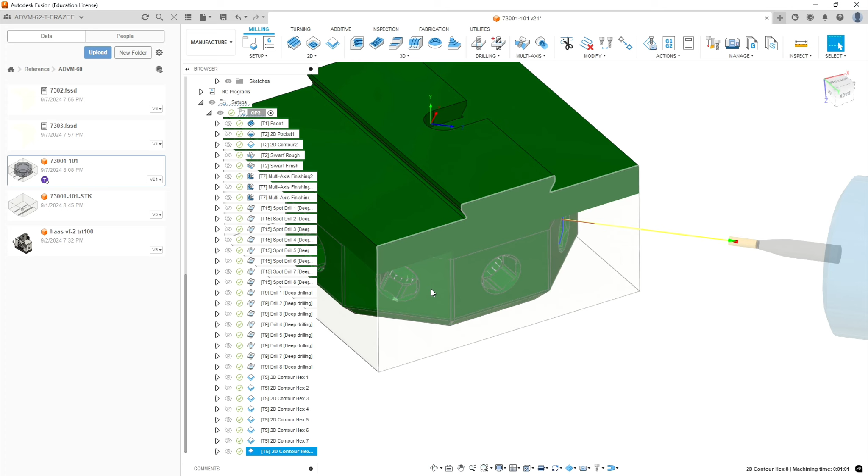We've completed the 5-axis routines on here, and now we're going to go to a 3-axis machine to finish off our operations. So here we go. This is what our stock should look like at the moment. And we're going to take this and put it in a traditional vise in a 3-axis mill. We want to clamp it about halfway across these holes because all the work we're going to do from the orientation we're looking at the part at right now will need clearance for the cutters to roll over.

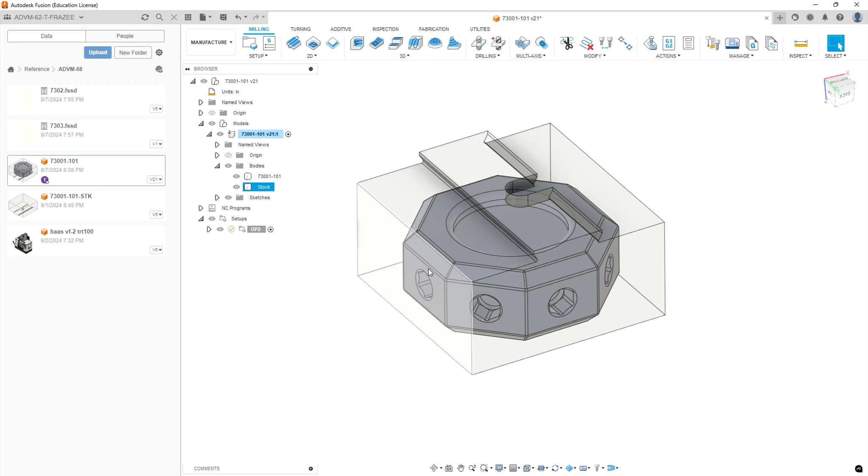I'm going to go ahead and minimize this, and we're going to do a little investigation here. So if we carry over from this stock, we're going to be basically milling the hat off and the edges of the part. So we're going to go to setup. We're going to right click and create a new setup. Now we're going to get some warnings off first, and that's okay.

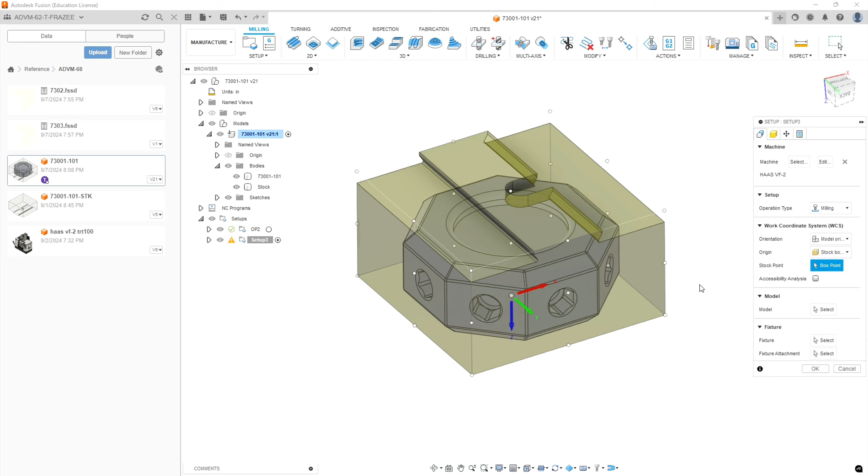Now because we're clamping on the hex, we want to set up our origin based off what we're clamping onto. It's qualified surfaces on the octagon. So we clamp against this forward face, the opposite face, and the left hand side can be our datum for our stop. Okay, and we're going to switch here to model box point, but at the moment we have the stock volume shown, so we're going to hide that.

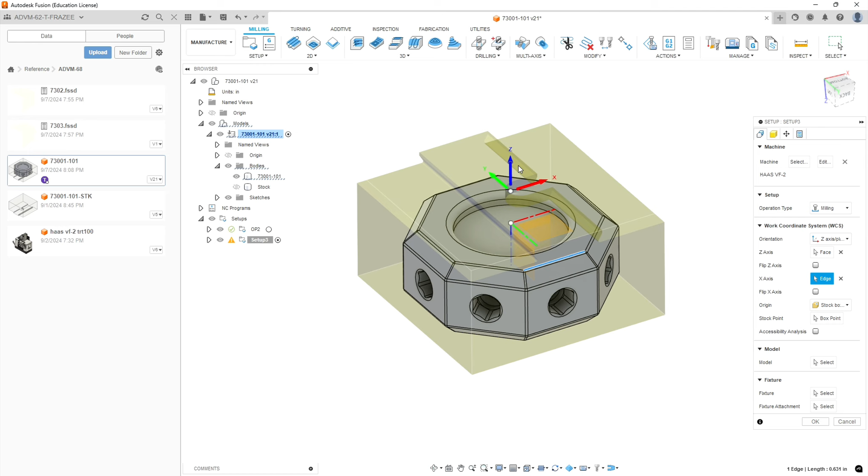Then we're going to go to model origin. We're going to pick plane normal to the z-axis and then the x-axis. So we pick the top of our part and the front edge, which is in the x-axis direction, and this should set the origin in the direction we want. Now instead of basing it off stock, like I said, we're going to go off model box point.

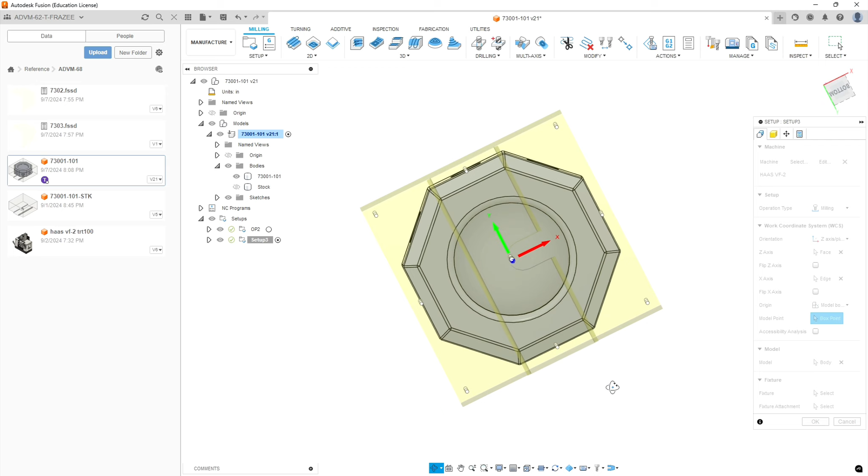And it looks like our model is not selected, so I'm going to go and pick the model itself, so that when I go to model box point, it's actually the model itself. This isn't always selected by default. Make sure you've got your body that's the actual part design selected so that you can pick this back left corner. Now the reason I'm choosing the bottom of the part, we've already qualified that surface. That's what's going to be touching our fixtures.

To set this, we'll put the part on top of parallels, but to find the origin on top of that parallel, we'll use a 1-2-3 block clamped so that the one direction is in the z-axis, and we set our origin on the corner of that to a stop and to the top surface, and then when we go into the offset menu we need to compensate by -1 inch to lower that origin to the top of the parallels. The reason we do that is we don't want the cumulative error of the fixturing where we held onto the part to influence this.

Okay, next tab, our stock. We'll leave it from previous operations, see if that works for us. We do want to deselect the Haas VF2. If it's still selected here, that was an error in my judgment when we set up the part originally. Okay, and then we're going to go to post-process. We're going to call this 7303.

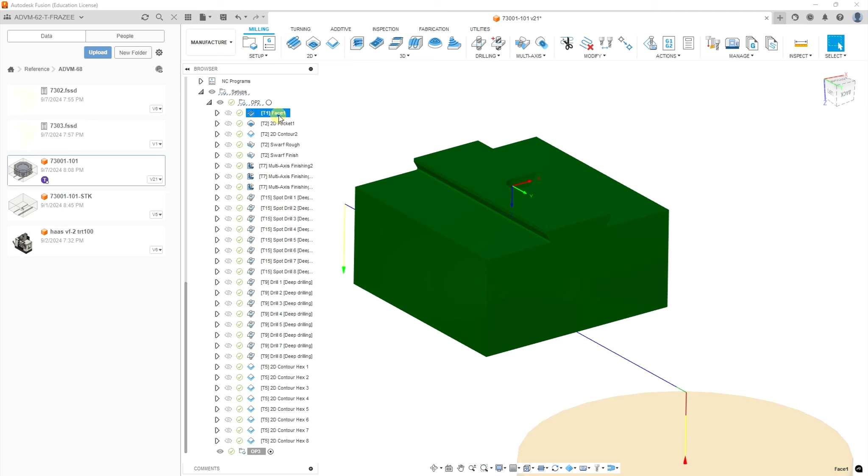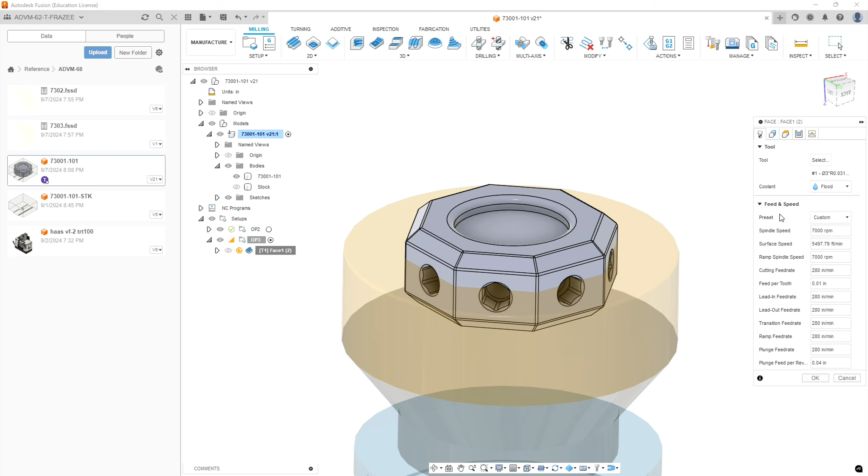We're going to grab our face mill, right click on that and hit copy. We're going to come back to operation 3, right click and paste. We're going to right click on the routine and change some things. We're going to leave all the motions at default. Under geometry though, we don't want a tool orientation. We're going to deselect that, which will bring on our setup orientation for 3-axis.

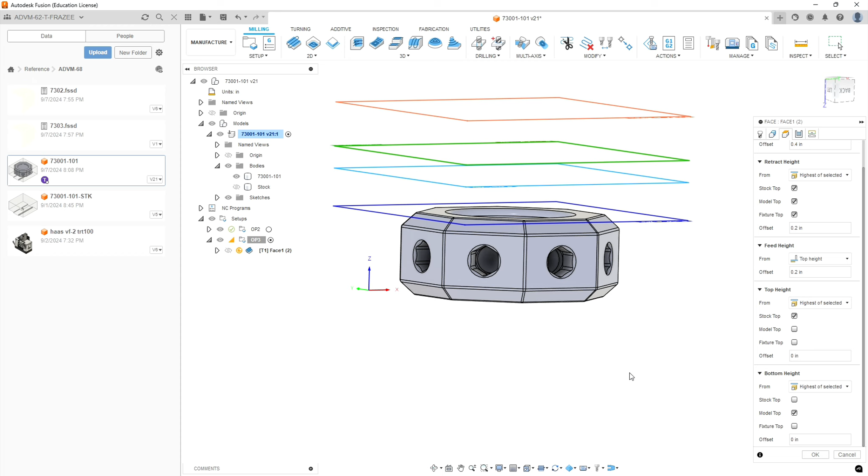And you notice it flipped to the top, and we got our orange rectangle, which is the volume of what we're machining. We'll then go to heights, and our top height will be stock, and our feed height will also come from stock. Our bottom height will be the model top. So we're going to be machining between the two blue planes. Now what we're machining off is the height of our dovetail there.

And that works out to about 344 thousandths when you do the math. So we don't want to do that all in one pass with this cutter, or we'll break it. So we're going to leave all this at default, but we're going to check this box called multiple depths, and we're going to take 60 thousandths off per pass, which I believe is the maximum for this cutter.

And we're going to use even step downs, and we're going to add a finishing step at the end, and we're going to go 30 thousandths finish, and we're going to slow our feed rate down to 100 inches a minute. In retrospect, we're going way too fast for how small this is. So let's go back here and let's slow this down. Let's go 100 inches a minute on these instead of 280. And our finished feed rate will be 50.

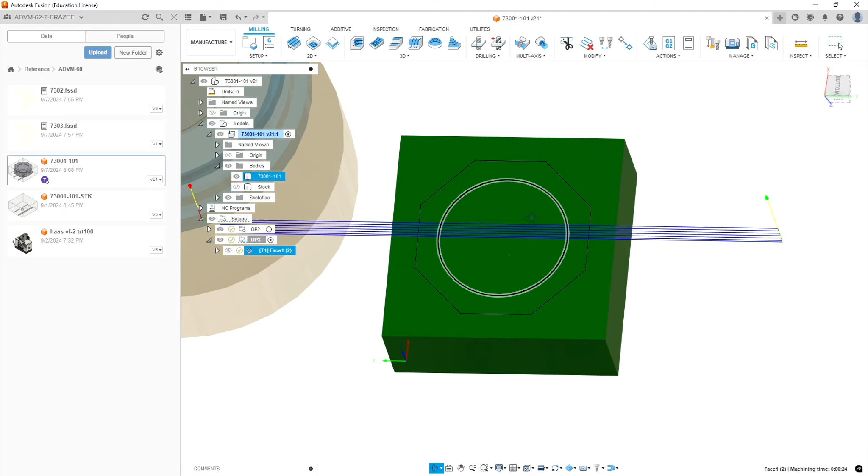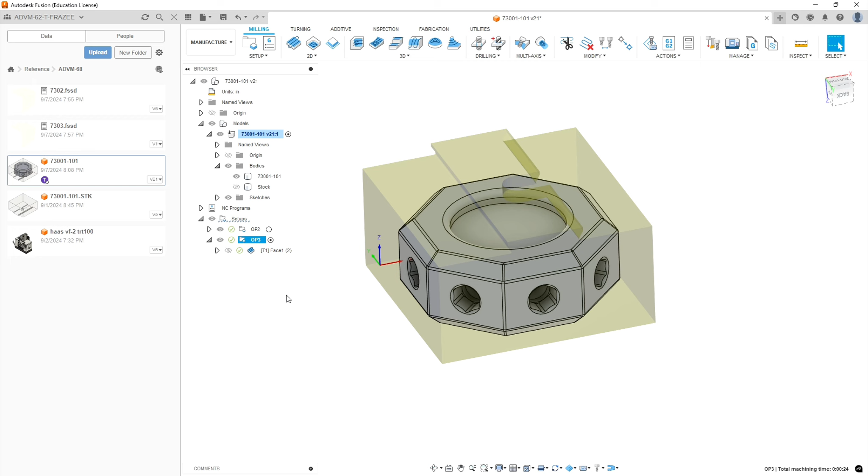Alright, now we can do the same thing with our next routine, which is going to cut this pocket. We're going to go back to Op 2 and we're going to borrow it. We're going to do a copy, close it back up, go to Op 3, we're going to paste. We're going to right click, we're going to edit that routine. We're going to leave everything at default on the first tab.

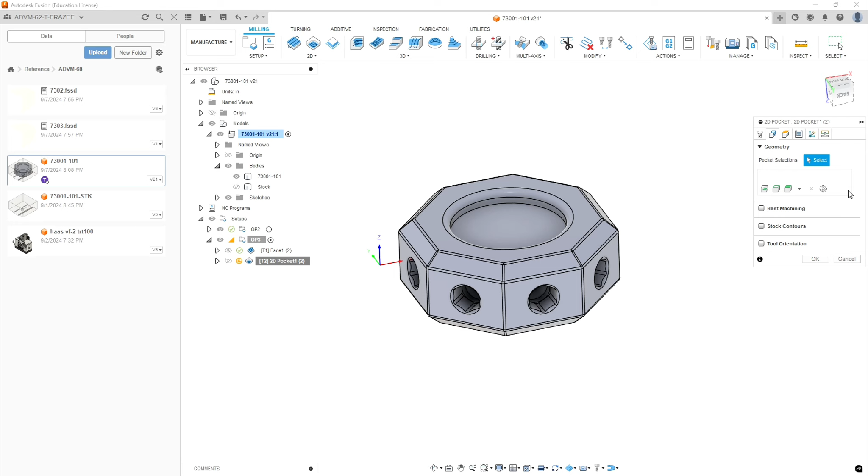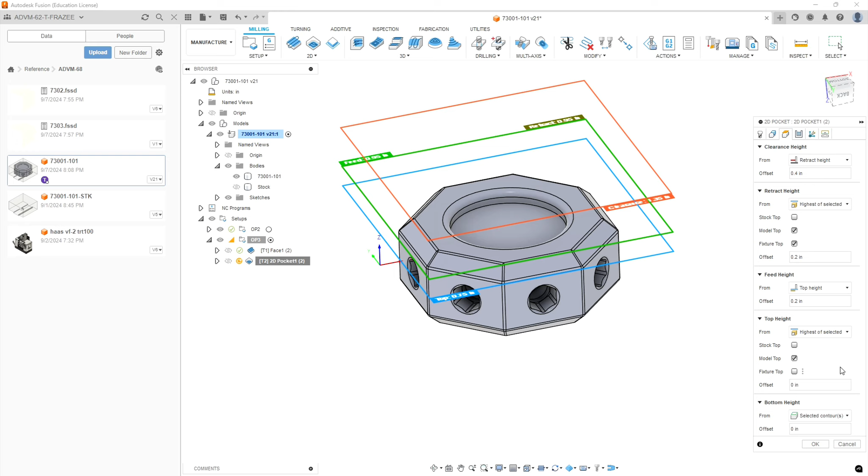On the second tab, we want to deselect what we have selected, and we want to unselect the tool orientation tab. And then we will select our new pocket and make sure that the Z-axis orientation is pointed up. On our heights, we're going to go from model top to model top because we've already machined off all the material above that. And our depth is going to be the selected contour. That's fine.

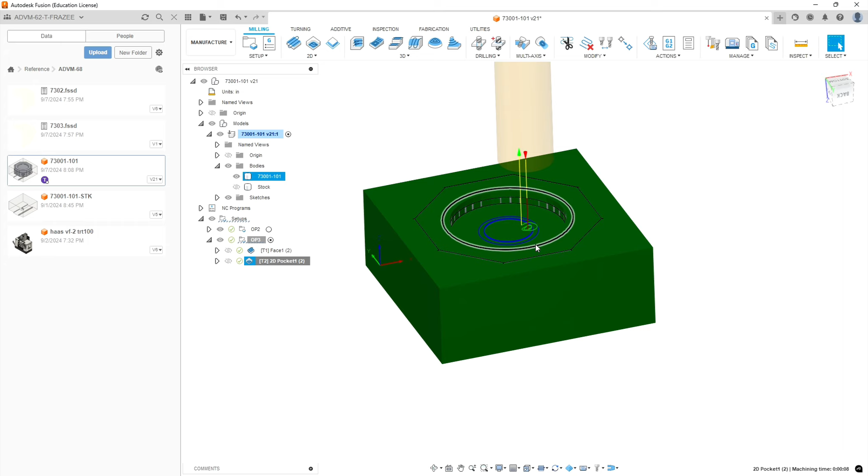Next tabs, we can leave all this the same. Next tab left alone, and the last tab should be the same as well. And hit OK, and we've now pocketed the inside out. Okay, next operation is going to be the inside fillet here.

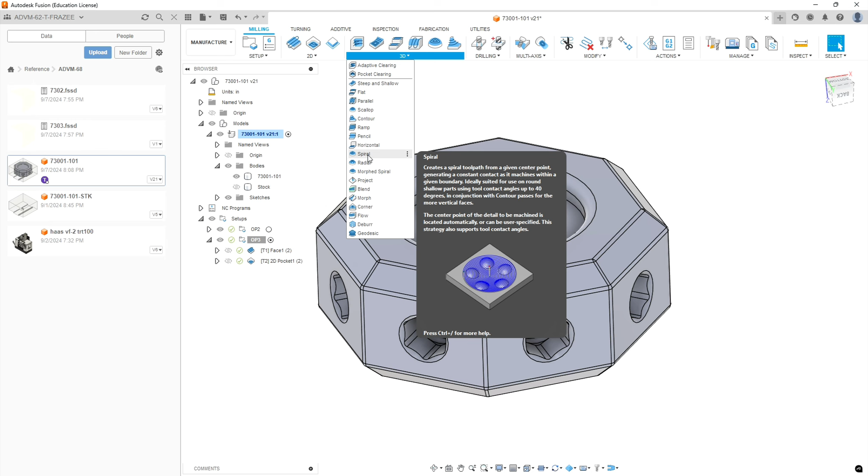We're going to use a command called spiral. Okay, and what this does is it spirals in a circular shape down the surface. And we're going to use the same step over we used in the 5-axis, and we'll see if we see a finished difference between the two different sides. So we select spiral. We're going to use our 1/8 inch ball mill from our library. And we're going to bump the RPM up to 6,000 and 60 inches a minute.

And we're going to go based off selection, and we're going to select the top circle and the bottom circle of the fillet. We're going to change our tool containment to outside the boundary because we want the ball cutter to go past tangency on the interior. And it's going to ask you to select a center point. So we're going to select the center of a circle that's concentric to what we're moving in. So we'll pick the bottom of the pocket.

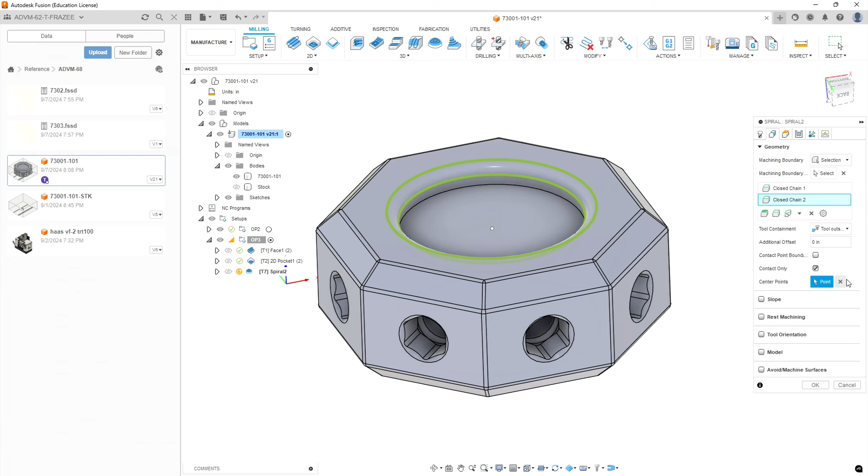And then we're going to avoid surfaces. Pick the top of the part, so we're going to avoid that by 4 tenths. And on the bottom, we're going to do something different. We're going to control that with the heights tab. Again, we're going to go from the top of the model, not the stock, in both cases. That lowers our planes down.

And we're going to select where we want the lowest of our cut to go. We don't want it to go to the bottom of the model. So we're going to pick the floor of this pocket, and then we're going to add 5 thousandths clearance on the bottom. That way we don't gouge into it with that ball cutter. Should be fine. Now we go to the next tab, is passes.

And we are going to machine from the outside in. And it should be going counterclockwise. We may have to check this box. It's kind of confusing on how it interprets what way is clockwise. So we'll have to simulate it and see, make sure it's climb cutting.

Okay, we're going to leave the outer limit at default, and our step over is going to be 5 thousandths. We want to cut in one direction, so one way, and we can go both up and down. And then we're going to pick this box that says smoothing. That's just going to increase the tolerance at what the surface is cut at. Multi-axis, there's nothing to set on that tab.

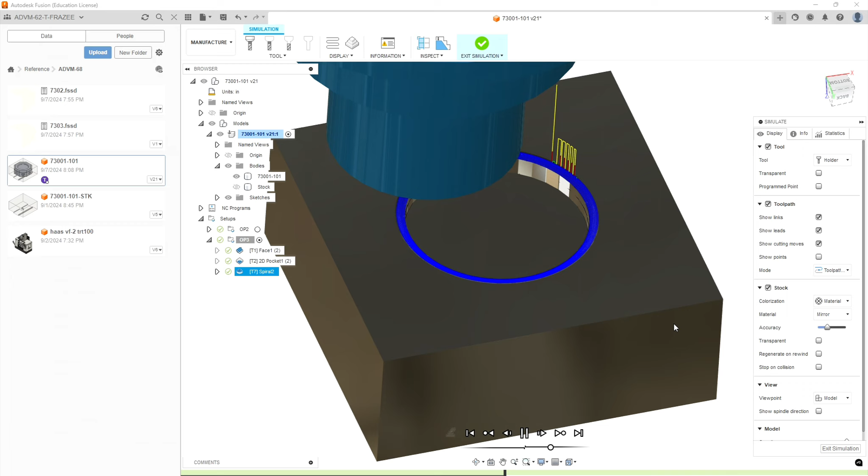Let's go to simulate. Let's see what direction we're cutting. So we're cutting in a clockwise direction, which is conventionally cutting against the surface. So that's not what we want. So we're going to exit the simulation. We're going to go back to our parameters. We're going to edit the toolpath.

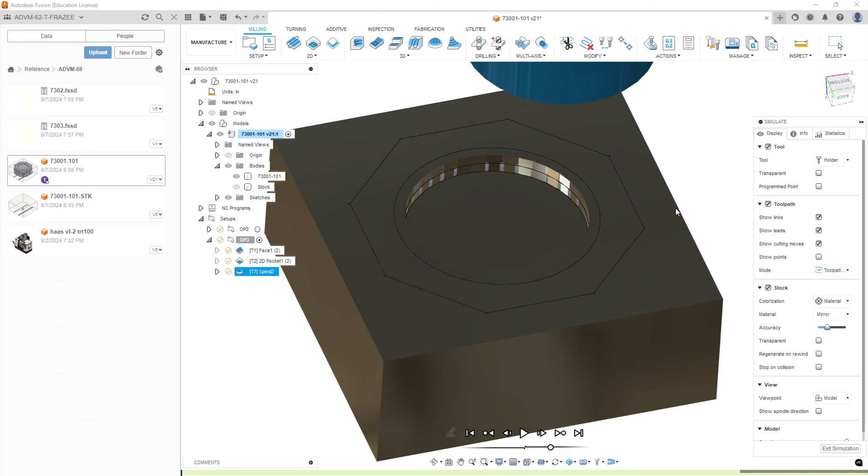And it says one way. We're going to change that to the other way. And let's see if that works. And that does not. It's still conventionally cutting.

So what we're going to do is we're going to go back to our passes tab. We're still going to have one way, and we're going to check this box that says clockwise. It's not intuitive, but it's one of these things where if the machine is cutting the opposite direction, just check the box and that should reverse its direction.

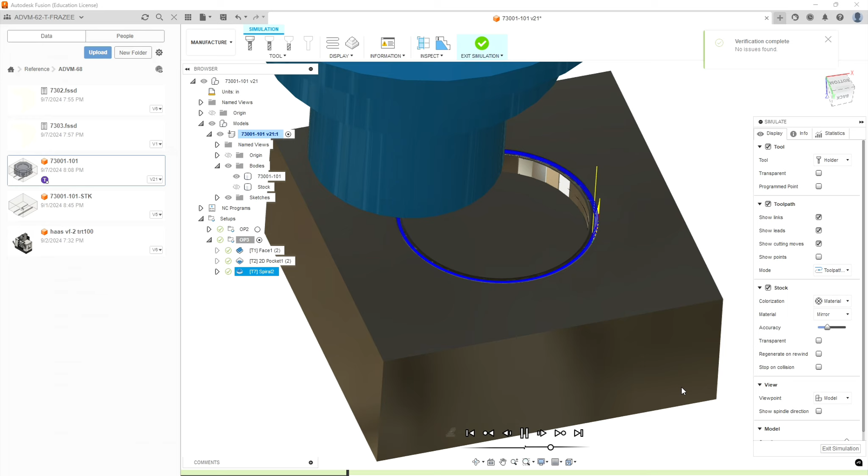Now we go to simulate. And it's going in a counterclockwise direction, which on an inside circle climb cuts. Okay, we're going to exit simulation.

Now we're going to cut this outside. Now we could come in here with a chamfer mill and cut these flat, but the problem is these fillets here are constant, and we would need a variable fillet there to have the chamfer mill give us the right resultant. So we're going to have to come back and surface machine every single one of those anyway.

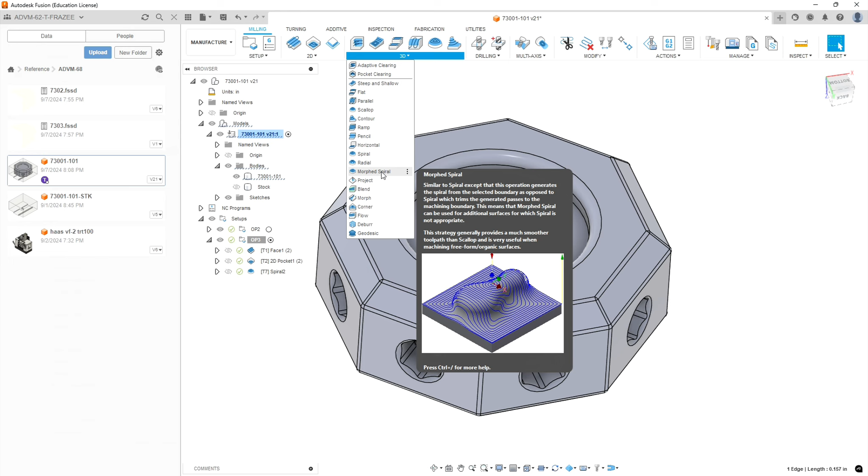So what we're going to do is a modification of what we did on the inside using a different command, but it works similarly. We're going to use the 3D command called morphed spiral. So what this does is it takes a shape that's not specifically a circle and generates toolpath based off your selections. So we're going to select the morphed spiral command, and we're going to use the same cutter, same settings there.

So we just go onto the geometry tab, and we don't want to use silhouette. That's if you're going to do the entire part. And we're going to do selection, and we're going to cut between the top octagon and the bottom octagon of the fillet and chamfer features.

Okay, and on the next tab, again, we're going to go to outside of the boundary. So we want the tool to go past the boundary with its full diameter, and we're going to avoid the same surface at the top. That way we don't cut into our flat surface.

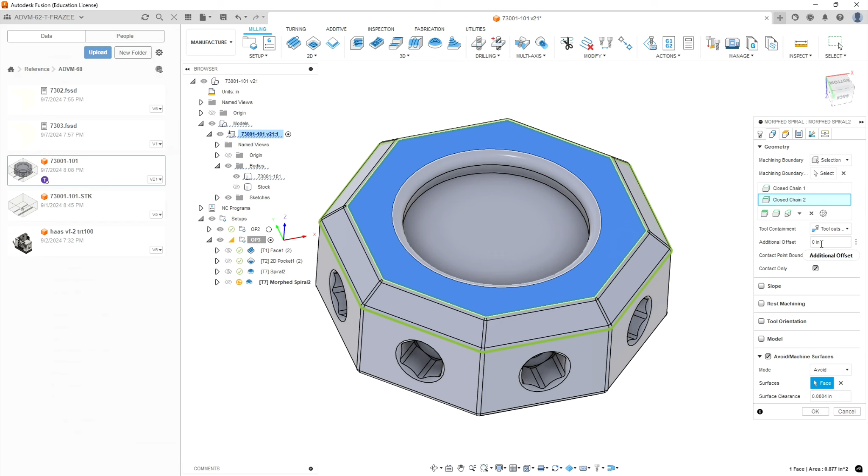We're then going to go to heights, and we're going to go from model top on both our heights, the retract and the top height. And our bottom height, we don't want to go to the bottom of the model. We want to go to a selection point. And that selection point is going to be at the tangency of the vertical wall and the fillet.

Okay, that's our lower selection, but we want the ball cutter to cut past tangency so we get a nice fillet there. So we're going to put in half the diameter of an 1/8 inch ball, negative 0.0625. Okay. If you wanted to, we could round that up to 63 just for good measure, and it'll cut a little bit deeper.

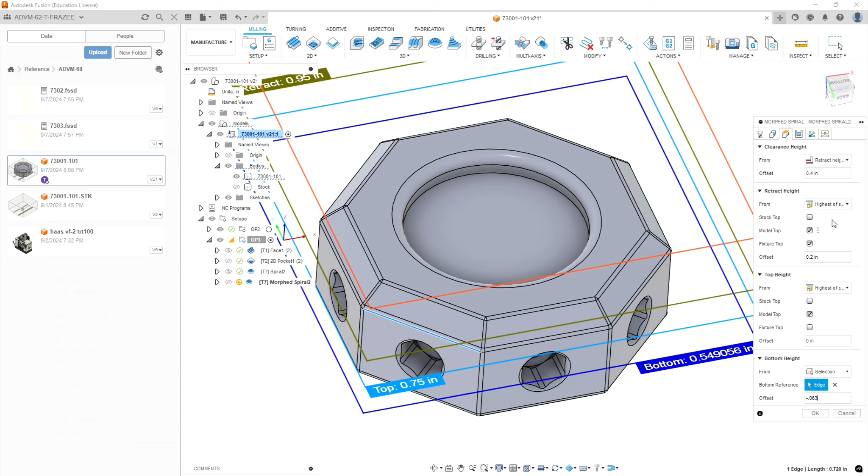Alright, multi-axis tab, nothing to do. Linking tab, we're just going to get rid of this vertical lead-in radius and the vertical lead-out radius. Now let's hit OK, and hopefully it does what we want. So it marches down the surface. We don't really have material where those corners are showing. That was machined away by a prior operation.

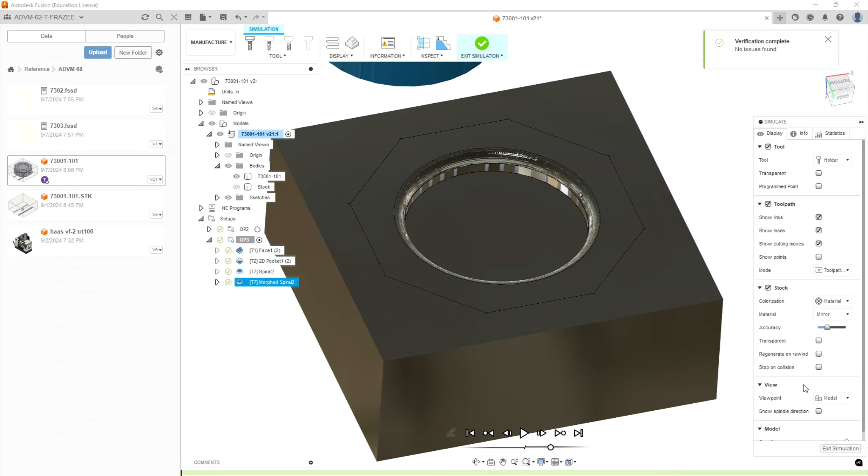So what we should be looking at is an octagon. It's already cleared around the perimeter, and then this cutter comes down and goes around circles. Now let's make sure we're going in the right direction. And we are not. On the outside contours, we do want to go clockwise, and it's going counterclockwise.

Alright, so let's exit the simulation. We're going to go back into that routine. We're going to go to the passes tab, and we're going to check this box that says clockwise. We also forgot to check this one-way direction. We only want to machine in one direction. And the step over should have been 0.005. I did not give you the right information. And we want the smoothing tab checked.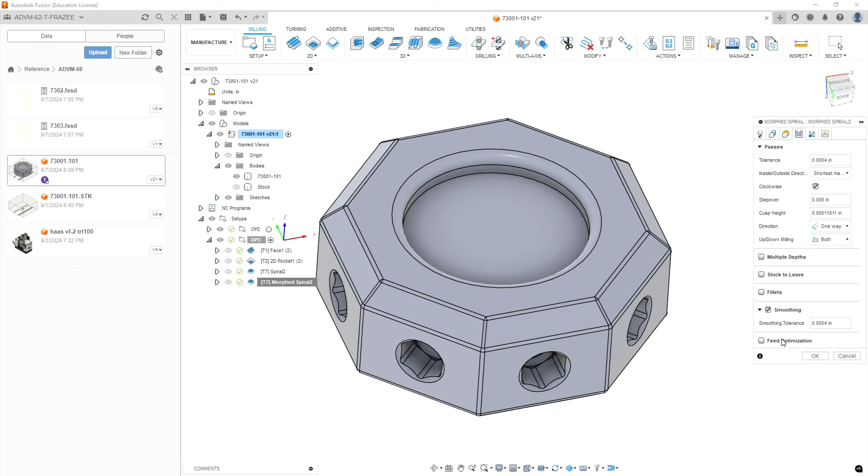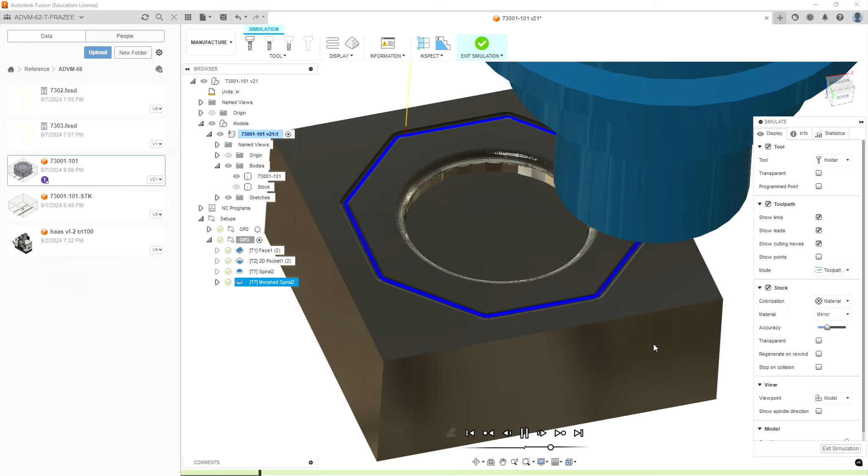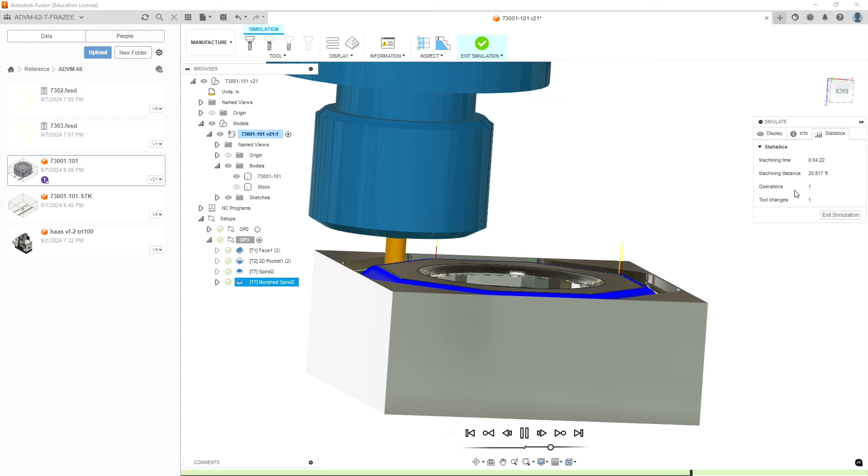Let's hit OK. It's going to take a little longer to process. Alright, you notice our step overs are closer together. And then let's do a simulate to see how it machines. And it's going clockwise like we want. Again, in reality, there's not that much material to remove. Alright, let's make sure we've saved.